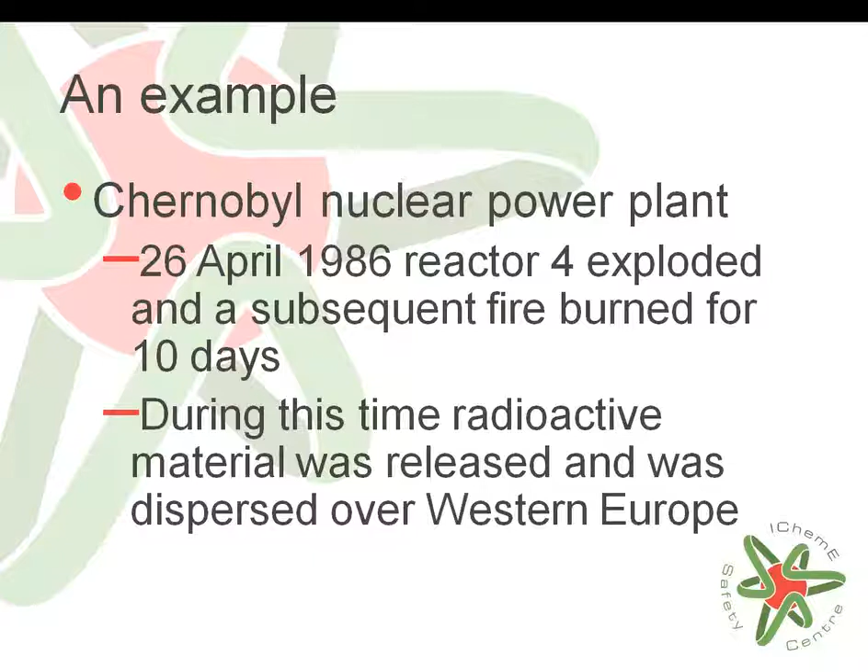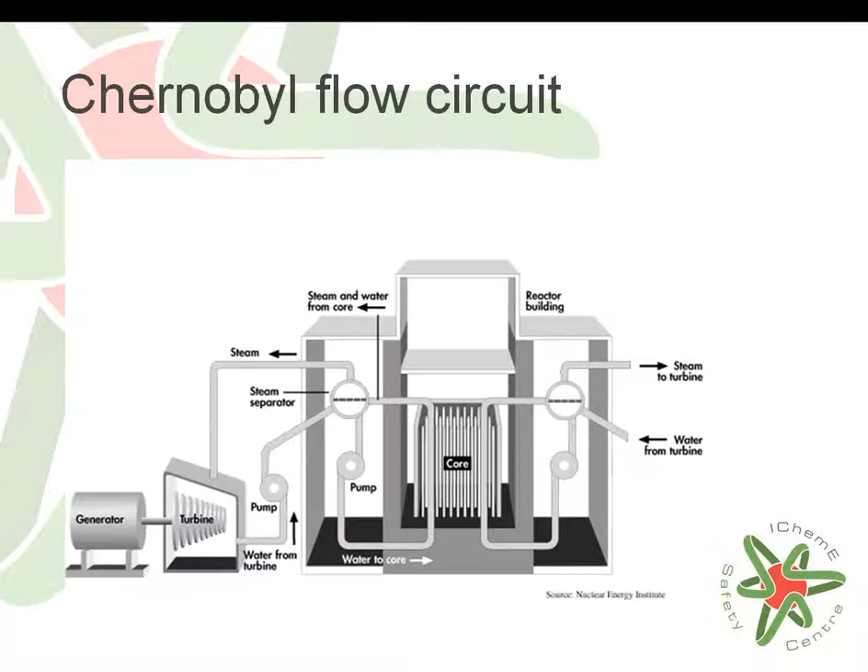So let's go back and take a look at the test that was taking place when the operators decided to hit the emergency stop button. At 23:10 on the 25th of April, the station was given approval to reduce power output, which would allow them to conduct a safety test. This was to test if the steam turbines could generate enough power when coasting down to run the main circulation pumps in the event of a power loss, whilst they were waiting for the diesel generators to power up.

So this test was basically being done for a safety reason to ensure that they could provide continuous power to their water cooling while they were waiting for their diesel generators to kick in. At midnight, a new shift took over. Now, it's important to note that the reactor was not designed to run at low power, and the operator overshot the test target. The reactor power plummeted to 30 megawatts at 0028 hours.

The operators wanted to abort the test at this point in time, but they were overridden by their supervisor, who forced them to continue. The operators began to withdraw the control rods as instructed by their supervisor, and they were able to raise the power to 200 megawatts at around 1 a.m.

With only a few control rods in the core, the reactor's capacity for excursion now exceeded the ability of the remaining safety systems to shut it down. At 1:19 a.m., alarms showed that the water level was too low in the core. The operators tried to increase the water flow manually, and by now they had all 8 recirculation pumps running to get water into the core. But they were only seeing small temperature changes and large power fluctuations. The reactor was becoming increasingly unstable.

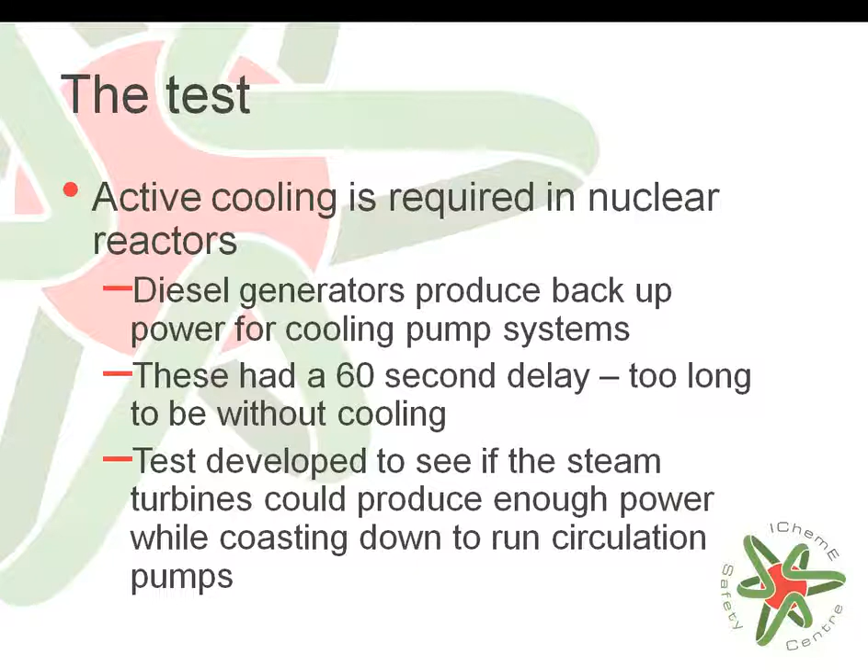Now, it's also important to note that in terms of trying to make the test pure for what they were trying to do, they decided to take some additional steps. So they'd actually disabled the emergency cooling system. They'd removed the pump fuses and the valves were chained and padlocked shut. This seems to have been due to the belief that there was a danger of heat shock if cold water was allowed to rush into the hot core of the reactor, despite the fact that that was a fundamental part of the design in creating emergency cooling.

Secondly, the test was to be carried out live. Instead of shutting down the reactor and measuring the electrical energy generated by the coasting steam turbine, the plan was to keep the reactor operational so the test could be repeated if necessary. And thirdly, most of the reactor emergency shutdown systems were disabled. In part, this was to allow the test to be repeated if it had failed the first time.

It's also important to note that this was the fourth attempt that they had tried to do this particular test, to test the design rating for running down the turbine to generate electricity. So effectively, the facility was left without its safety backup systems and operating outside its normal operating windows.

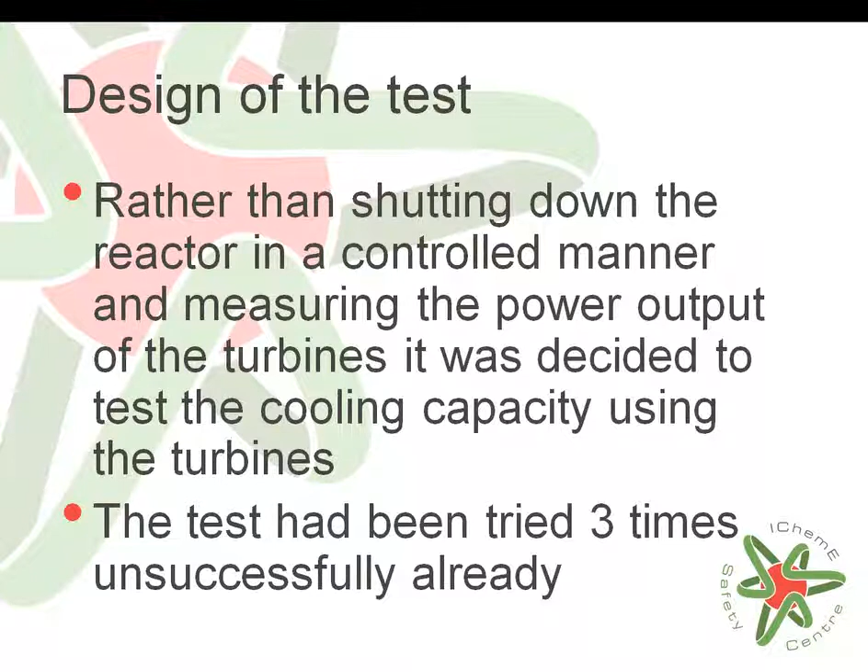It's important to go back to the design of the reactor to understand why they decided to do the test in the first place. When the reactor was being designed, the experts recommended that a pressurized water reactor design should be installed for the Chernobyl complex. This design was said to be superior, intrinsically safer with lower emissions than a boiling water graphite moderated reactor. But by 1965, it was clear that the mass production of the pressurized water reactors would be very difficult. In fact, there was only one factory in Leningrad that had the necessary technical expertise to manufacture such a large and complex pressure vessel in the Soviet Union.

On the other hand, the inferior boiling water graphite reactor could largely be constructed on site with local suppliers of concrete and piping. Even the graphite blocks could be transported and assembled from modules on site. So this particular technology, the boiling water graphite moderated reactor, was chosen because it was faster and simpler to construct at the site, even though it was recognised as being an inferior and less safe technology at the time.

In an effort to try and generate faster commissioning of the facility as well, the commissioning tests were bypassed, because they wanted to get energy production occurring to meet some arbitrary targets that the Soviet Union government had set for the generation of power in that particular region, the area we now know as the Ukraine.

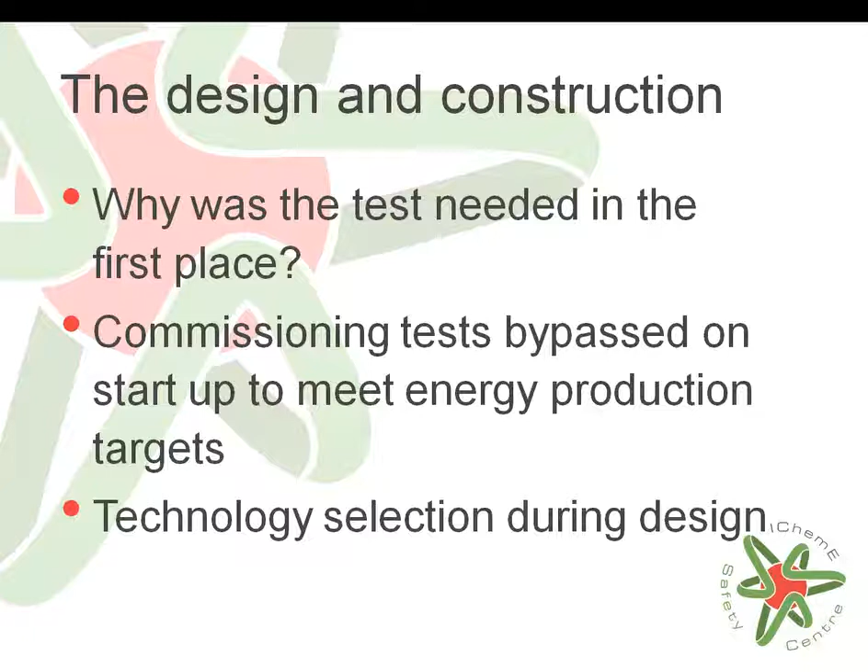So as I said, the startup was driven by the need for electricity generation, not by the design and construction requirements for a safer facility. Therefore, a less safe alternative was chosen because of the speed with which it could be constructed. The unsafe safety test had been approved by the plant manager, who was a turbine specialist, and the chief engineer, but he was actually an electrical engineer, not a nuclear engineer.

It appears that his interest in assessing the electrical power from the coasting turbine had blinded him to the dangers of operating a nuclear reactor with its safety systems disabled. The people of the town were not evacuated on the morning of Saturday the 26th of April because the senior managers could actually not believe what had happened. Eyewitness accounts of an exposed and burning core were ridiculed all the way to Moscow. Dosimeters that read off the scale for radioactivity were declared faulty because they couldn't possibly be reading that high.

The nuclear power plant had been producing energy for 10 years without a major off-site incident, and it was assumed to be perfectly safe by those outside the plant and the senior managers. So this all clouded their judgment in what they were actually seeing and what was going on. Effectively, this also brings in what we now call confirmation bias. They were looking for the answers to questions based on what they believed. So they believed their dosimeters were giving them incorrect results rather than the fact that they were reading off scale.

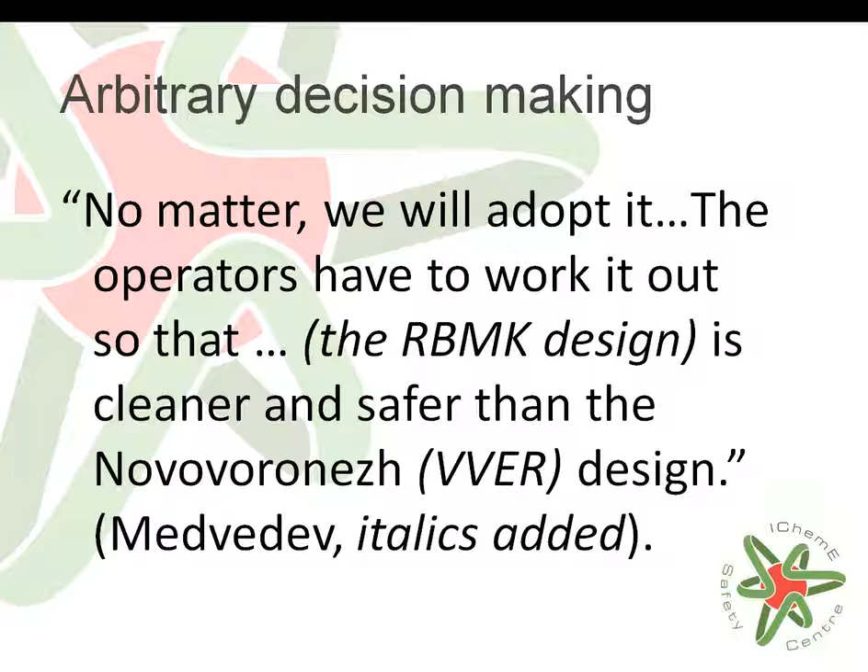But it's important to note that there was actually a significant failure to learn here as well. In Lithuania in 1983, so 3 years earlier, there was a similar incident that had occurred. The control rods were out of the reactor in Lithuania, and the operators decided to put them back in to control the generation of power. As the control rods descended back into the core, the operators observed a surge in power. The tip of the control rod was made of graphite, the same as they were at Chernobyl.

And as the control rods descended, they actually displaced the water. So instead of reducing power in the reactor, it actually increased because the displacement of water removed some of the cooling ability on the reactor itself, and so this created some issues associated with the reactor.

Now, unfortunately, at the time within the Soviet Union, there was a significant inability to share learnings across different sites. So whilst there were several people in the Soviet government at the time that knew of this particular issue that had occurred in Lithuania, it was not communicated through to other facilities operating similar or identical sorts of reactors. So the operators at Chernobyl had no idea at the time that when they dropped the control rods into the reactor, it would actually displace the water, which would cause an increase in power in the reactor, which resulted in part of the runaway reaction being triggered.

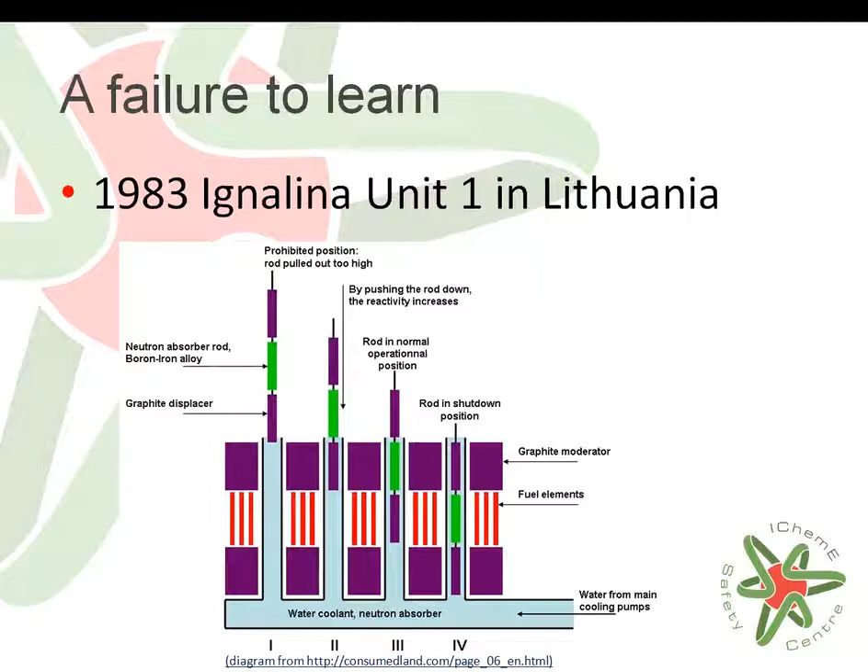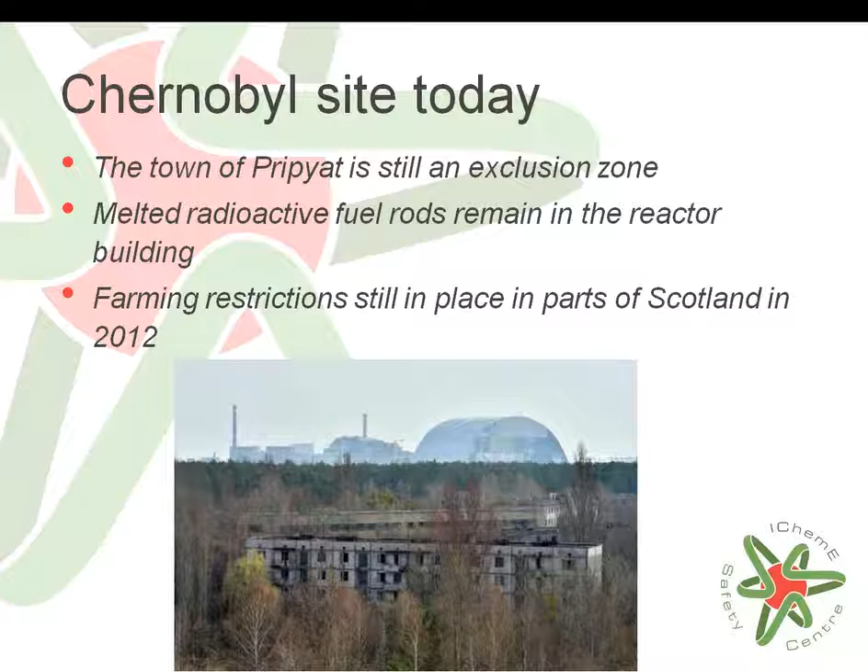So now I'd like to move on to some of the lessons from Chernobyl. And these have been taken from the Loss Prevention Bulletin edition that I mentioned, from an article written by Fiona McLeod on this particular issue. And this is where the idea of looking at management by target comes from, and we'll talk a little bit more about that shortly. But effectively, we saw artificial deadlines lead to the creation of shortcuts in the process. There were simplified targets in complex environments that resulted in unintended consequences, such as the commissioning testing not being done to determine how they would deal with the loss of power.

There's also something here around leaders needing to listen. What eventually came out in the investigations done in Chernobyl was that the engineers responsible for building it were trying to tell the government that there were problems, but the government was not listening, and the leader and the engineers were unable to tell them those issues as well.

And it's important to note that real leaders will tell people what they need to hear, not what they want to hear. And Chernobyl was a clear case of people telling the management what they wanted to hear and not what they needed to hear.

Things happen differently on night shift, and I can certainly attest to this, having worked night shift in part of my career as well. The test was meant to occur during the day, but it had been delayed for about 12 hours because there was a need for additional power at the time. So the power station was unable to wind back their generation to do the test. So it was left to occur on night shift when there were less people around to monitor and manage what was actually going on.